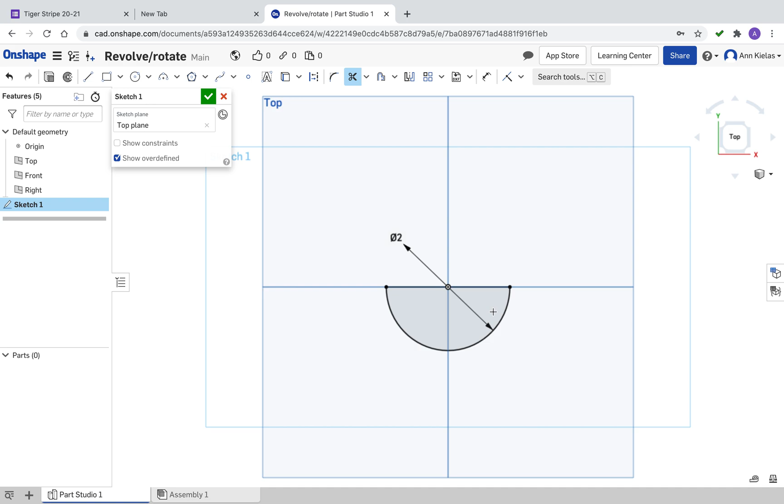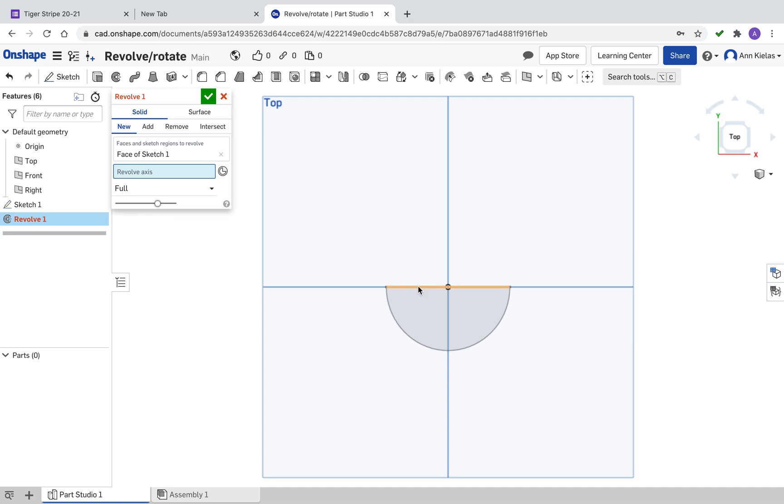Now I'm going to click the green tick mark to save the sketch, then click on the Revolve tool. The face and sketch region to revolve is this face, and the revolve axis is the center axis. I just need to click the OK button. And you can see, if I make it isometric, that I've got a round sphere.

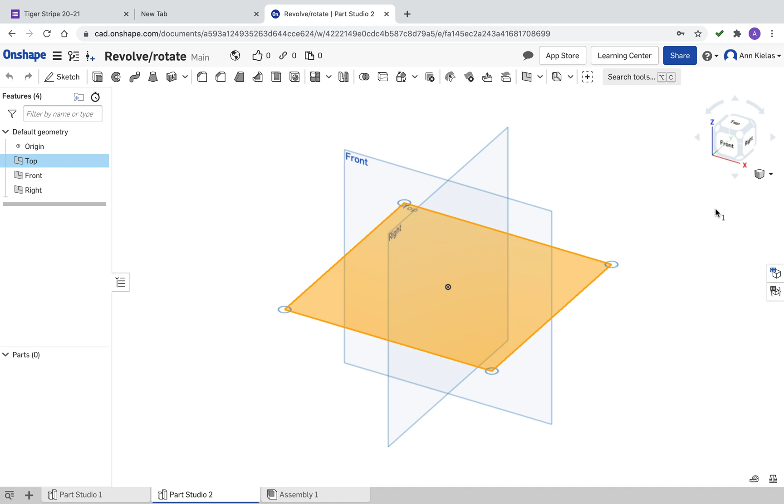As a second example, in the same video, I am going to make a new part. I'm going to Part Studio, create Part Studio to get a second part in the same object. Oops, I meant to go to the top and I went to the front. So I'm going to draw again on the top surface.

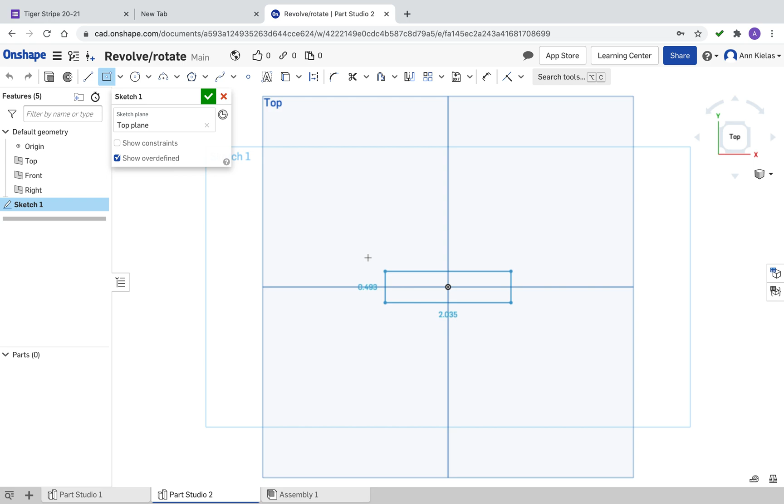For this one, I am going to make a sketch and make a big center point rectangle. It's bigger than my 2-inch diameter sphere, so I'll make it 3 by 3. 3 enter, 3 enter to make that a 3 by 3 square. I'm going to tick that.

I'm going to choose the sketch face and extrude. Since it's 3 inches, I'm going to make a 3-inch cube. You can see I've got a 3-inch cube still on the top surface.

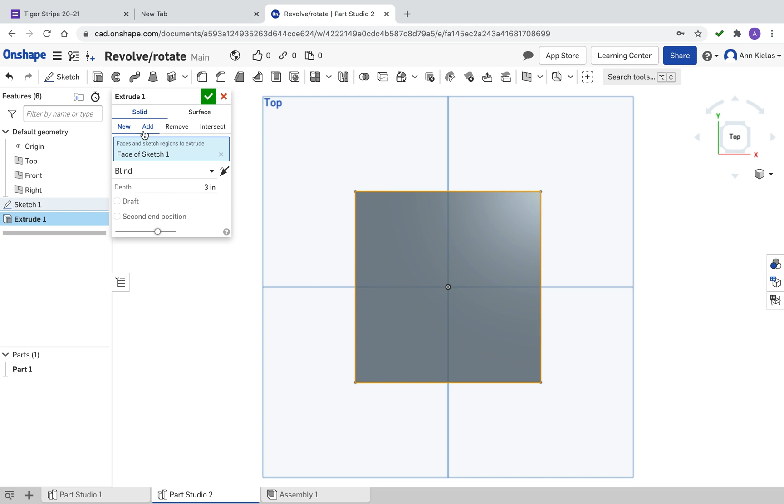Now I'm going to make a new sketch on the top face. I'm going to make a center point circle right here, and make it 2 inches. I'm going to click OK.

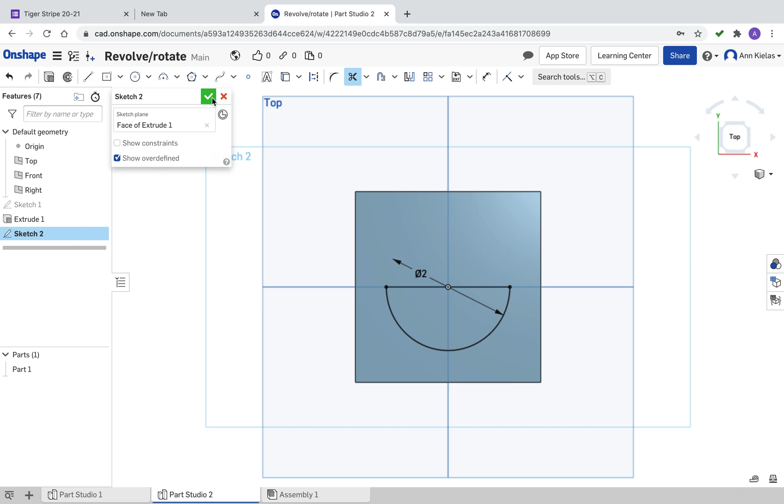Nope, I forgot to draw the line first. So I'm going to draw a line again across the middle of this, touching both sides. I'm going to trim half of that. And okay.

Now I'm going to revolve this, but instead of adding material, I'm going to remove material, and merge with all. The face and sketch to revolve is this face of the circle, and the revolve axis is the center line. I click OK, and you can see by doing that...

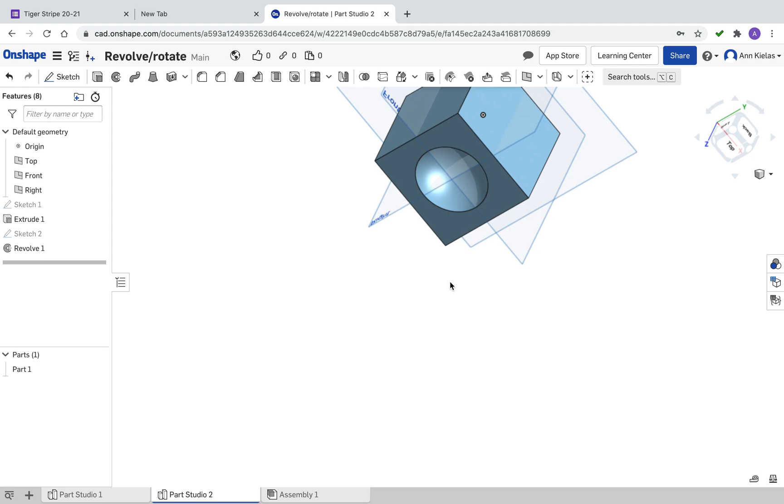I made a dimple, a 2-inch diameter, so it goes down 1 inch. And I removed the material, so now I've got this divot in the top. That's a second option.

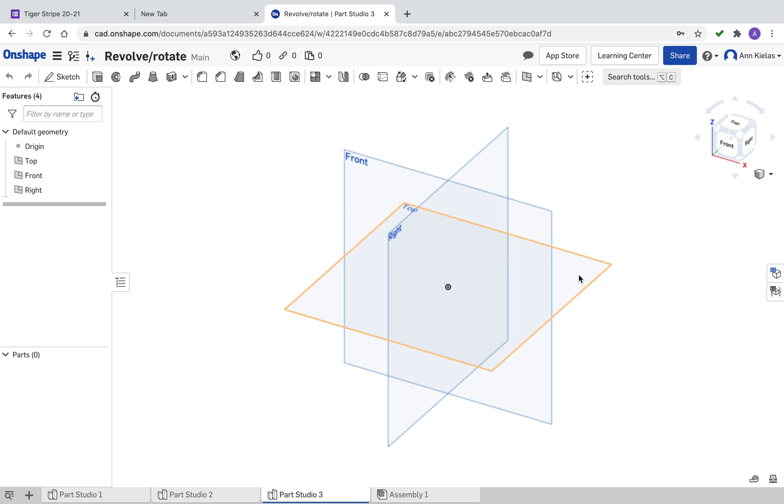And then for a third example, I'm going to create a new Part Studio, drawing on the top surface again. I'm going to make a mushroom, something that's shaped like a mushroom.

So let me go to the front. I went the wrong way. Go to the front surface and draw on the front surface. I'm going to do a sketch on the front surface and make a corner rectangle. I'm going to make the corner of it start right here. Why won't it start? Come on.

Top plane... Oh, because I'm drawing on the top plane. I meant to draw on the front plane. That's my problem. Front plane.

Try again. I'm going to make a corner rectangle.

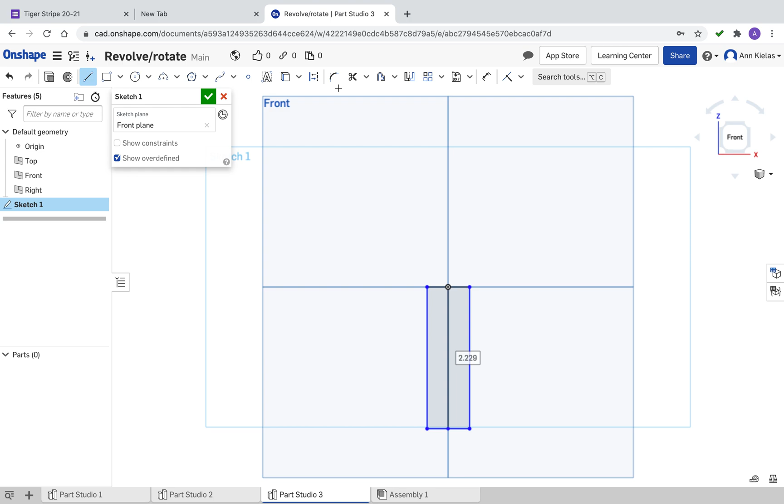All right, again I'm going to trim the middle out of it. Oops, I forgot to draw the line. Okay, trim the middle out of it. Trim those 3 lines.

Now, it doesn't have to be a circle to revolve. I'm going to save this sketch and revolve this. This is the face I'm going to revolve, and the revolve axis is this center line. Click OK. Now you can see, if you look at it from an isometric view, that I've got a cylinder.

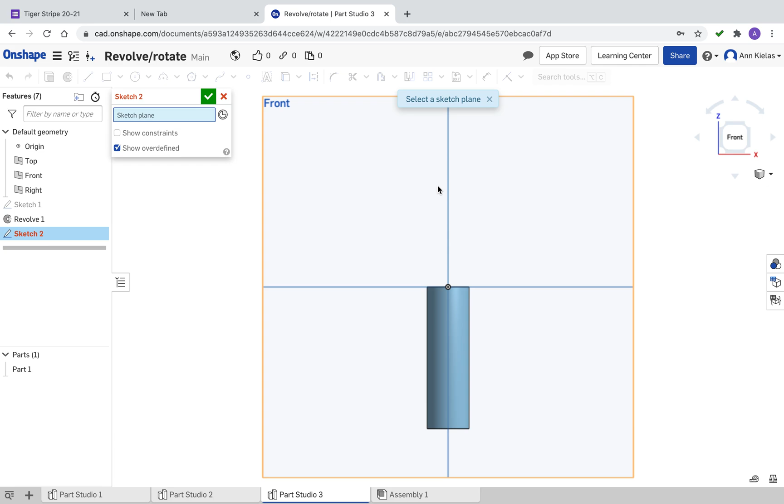All right, I'm going to go to the top plane and draw a sketch of a circle, center point circle. Let me think about how I want to do this. I think I need to be on the front plane still. Front plane, yeah. I'm going to make a circle.

Center point circle right here on this spot. Let's make it 3 inches. All right, now I'm going to cut this twice. So I'm going to make a line across here, from here to here. Oops, Control Z because I didn't get it in the right spot.

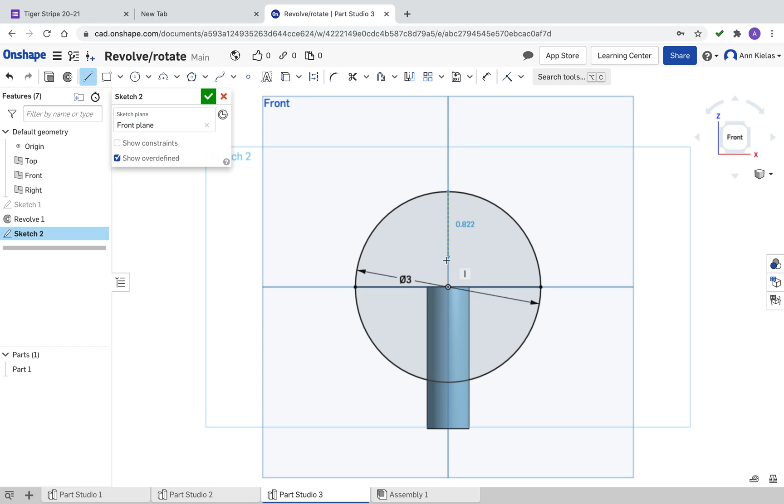Make a line from here to here, and then from here to here. All right. Now I am trimming this quarter of a circle and this half a circle, and this part of the center line. So all I'm left with is a quarter of the circle.

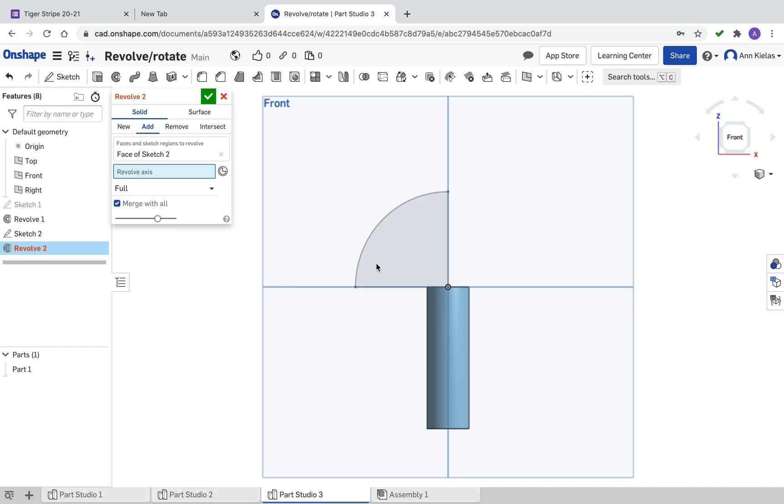I'm going to revolve that, adding material and merging with all because I've already got this front surface. The sketch face to revolve is that, the revolve axis is this, and I'm going to click OK.

And now you can see when I rotate it that I have kind of a mushroom shaped thing because I did a quarter circle.

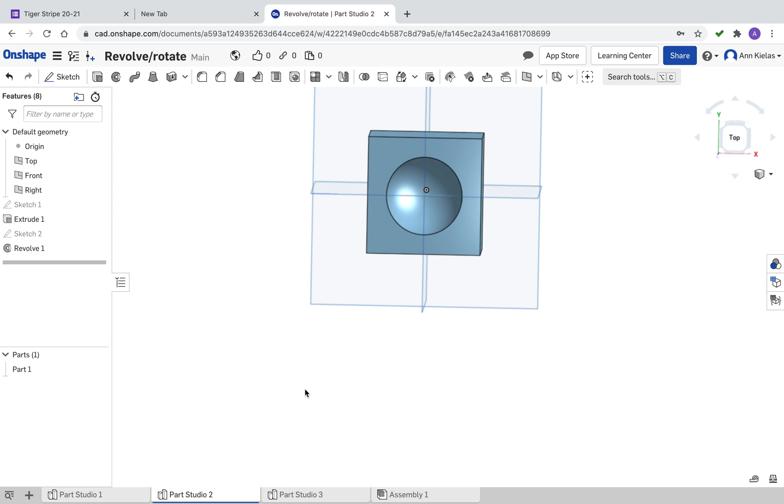So that's 3 different ways that you can revolve or rotate. You can make a sphere, you can remove material and make a kind of a dimple, you can revolve just a half of something, or you can revolve a cylinder out of a rectangle. So that's a bunch of different ways that you can revolve something. Those are really useful.